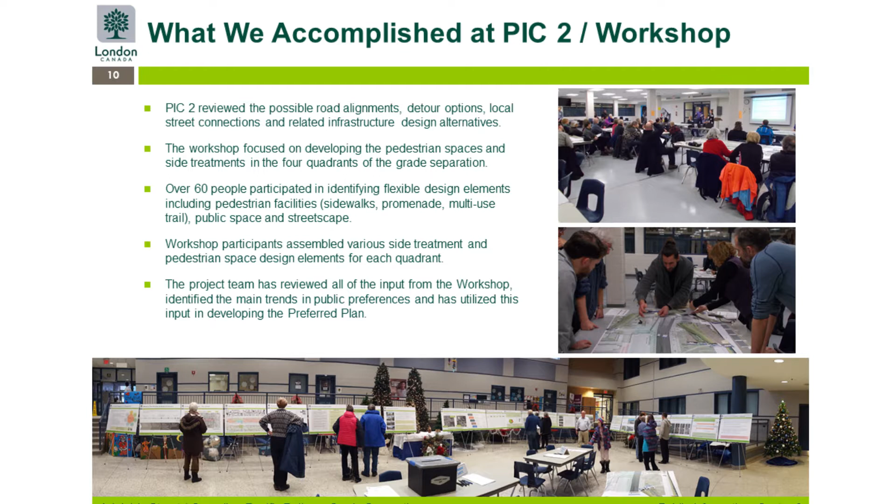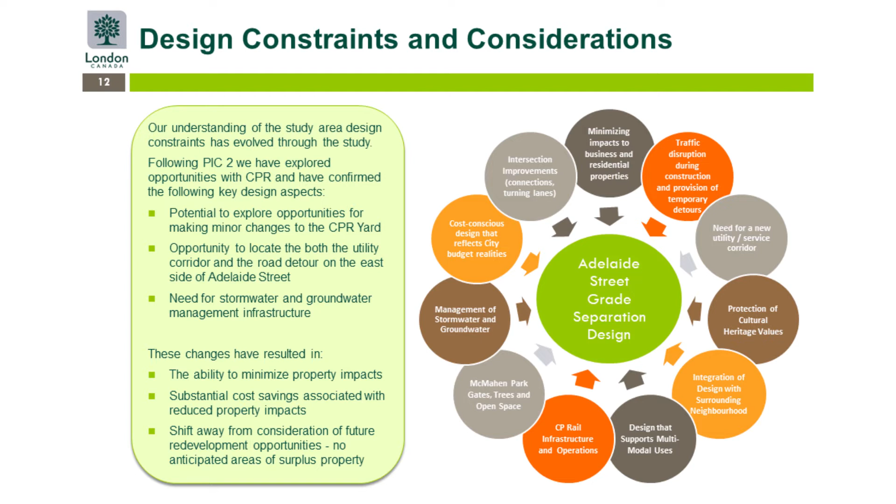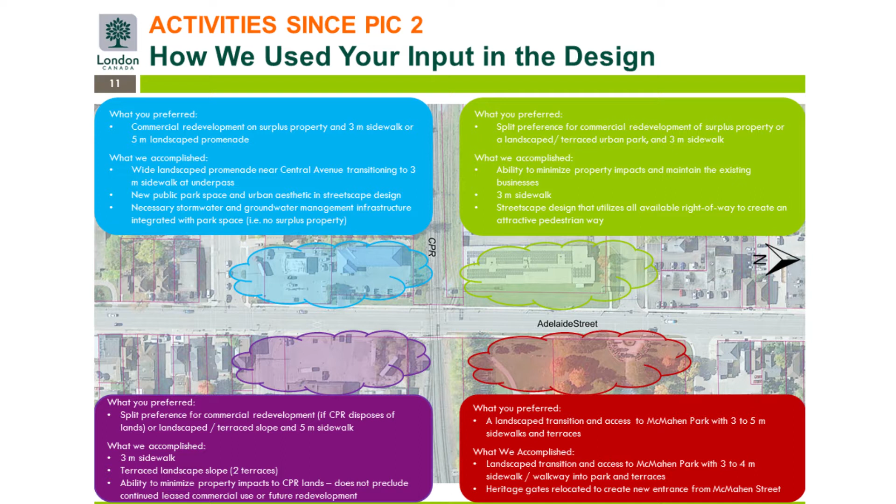The second public meeting was held in December 2016 and centered around a community workshop to obtain input on some of the streetscape design elements. The input we received enabled the project team to prioritize the streetscape design aspects that were important to the community. Since then, the project team has been completing technical investigations and has had an ongoing dialogue with CP Rail to develop a design that reflects transportation needs, property impacts, community interests, culture, and public input.

Adelaide Street is a key part of the Woodfield, Old East Village, and Piccadilly neighborhoods. It's also an important transportation corridor that accommodates over 25,000 vehicles every day. Unfortunately, the road is blocked numerous times throughout the day by rail traffic, which leads to cut-through traffic through adjacent neighborhoods. As a result, this project is the city's top priority for new grade separations in London.

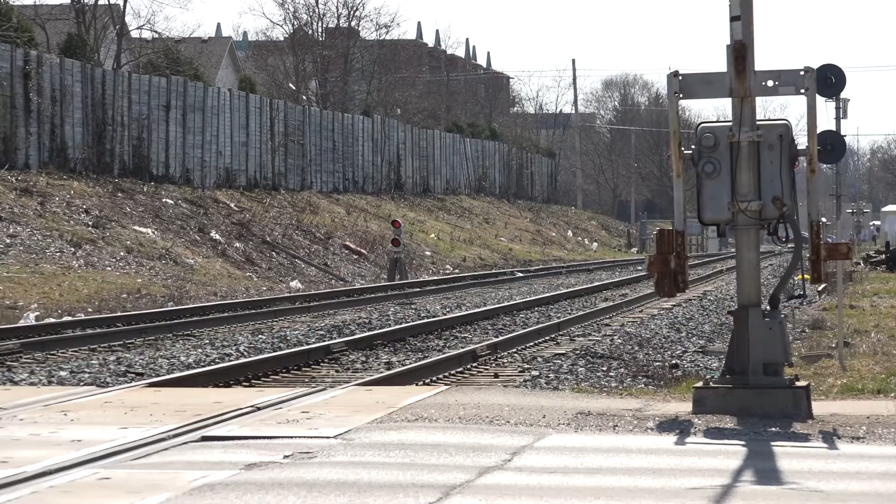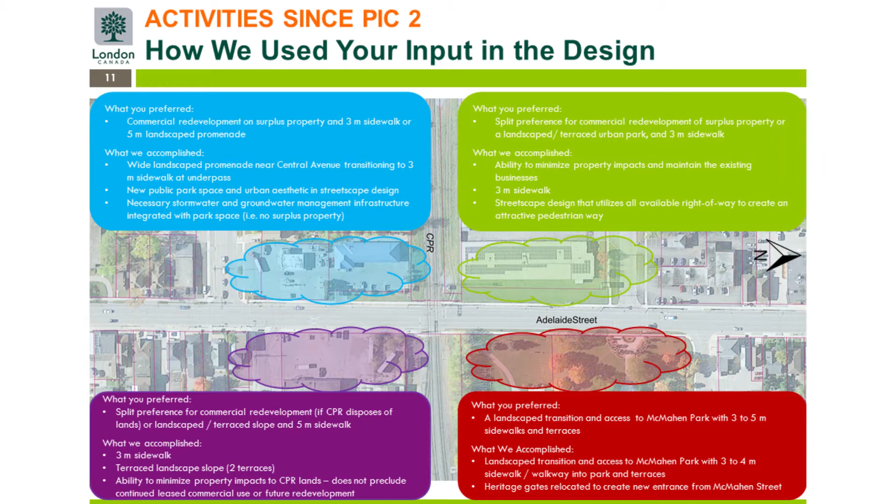One of the most exciting aspects of the project is the opportunity to incorporate streetscape design elements. The community input received at the previous workshop has guided the development of these aspects of the project. Cindy Rowan is part of the project consulting team that is working on creating an exciting streetscape for the project. Hi, I'm Cindy Rowan. I'm a landscape architect and urban designer with WSP, and we've had some very informative and close consultation with the community and with stakeholders and with city staff, and the new design really reflects this process.

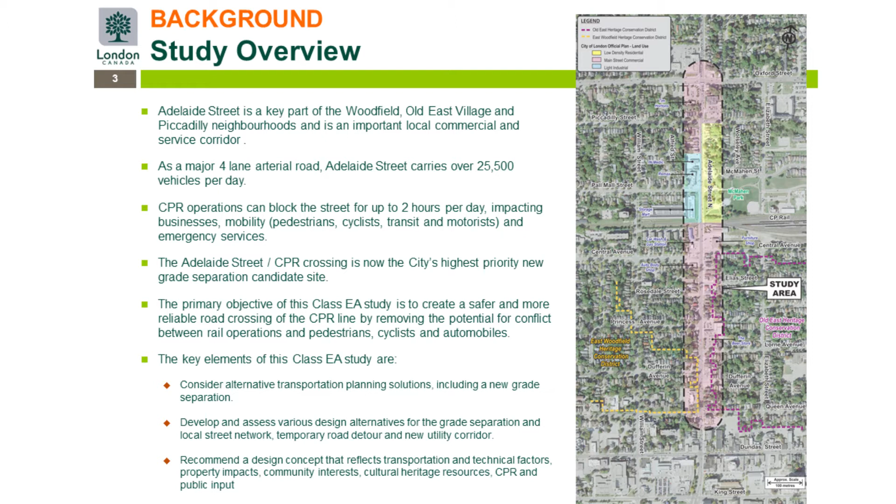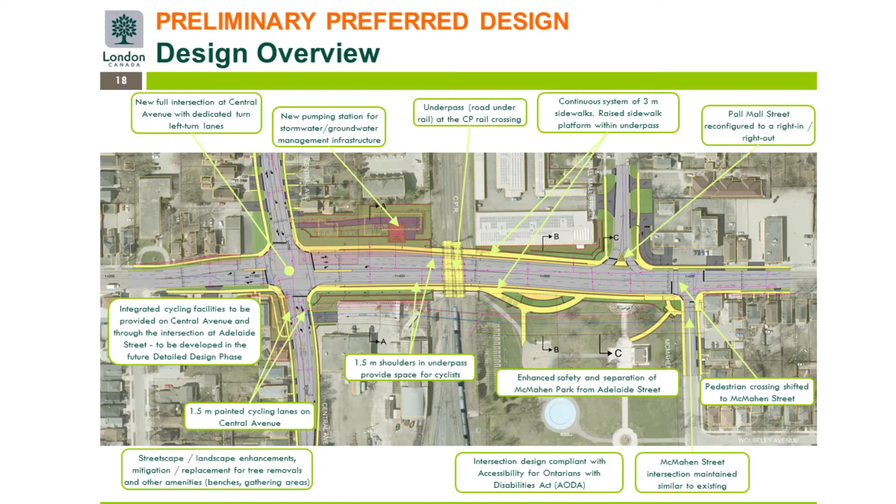So starting near Central Avenue, this is where the road starts to drop down towards the new bridge. The grade separation is slight at this point, but we will have some small retaining walls that really frame that intersection at Central Avenue and create a bit of a gateway as you proceed down towards the new bridge. Most importantly, the project team is recommending an underpass, meaning the road will go underneath the rail line.

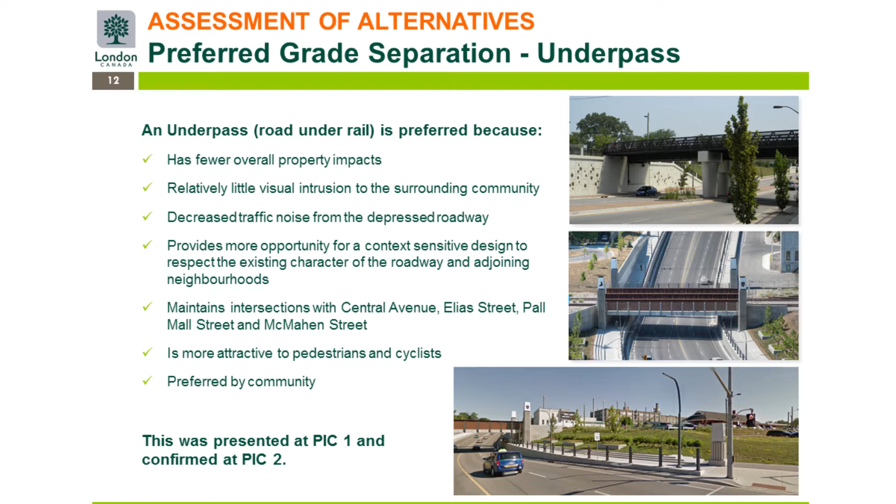So the primary goals of the streetscape design for Adelaide are really to integrate the new bridge and the grade separation into the community in a way that minimizes impacts to buildings, property, and businesses, and really knits itself seamlessly into the heritage character of the communities that surround it. We really want to look at creating very pedestrian-friendly streetscapes and create that connection between the various communities that exist today, but through the new grade separation, so that it doesn't feel like a barrier, but it feels like a part of the connectivity of the neighborhoods that's there now.

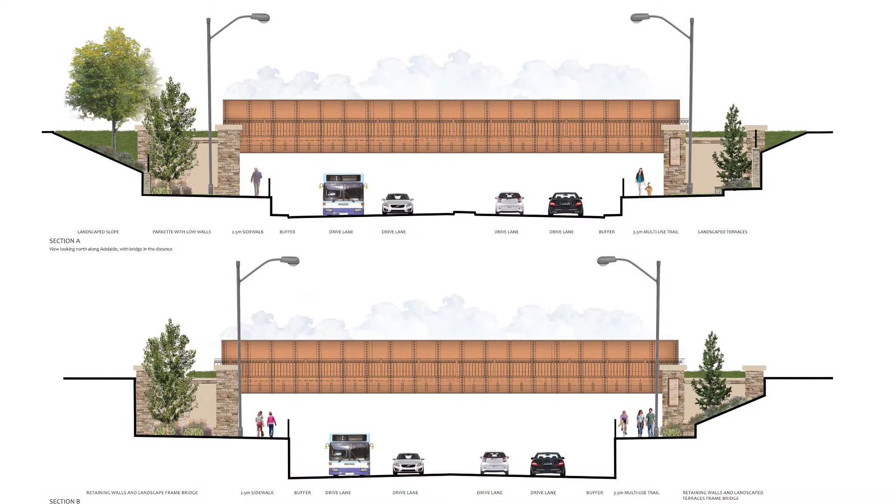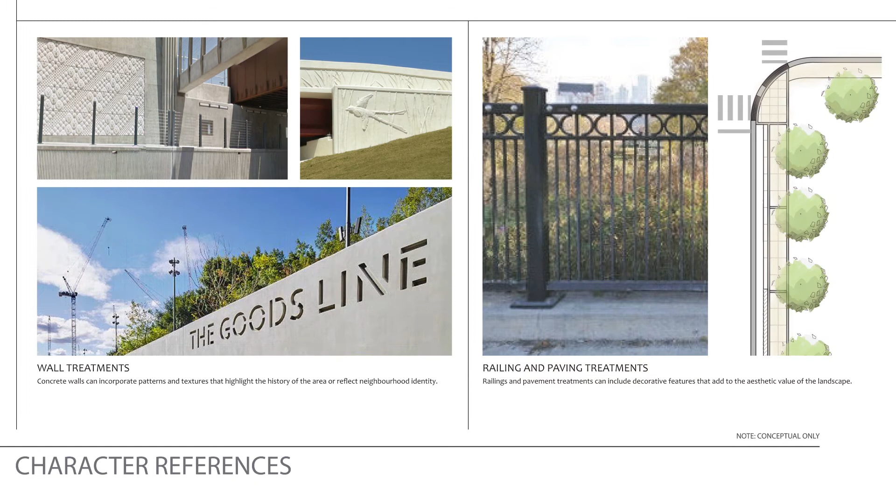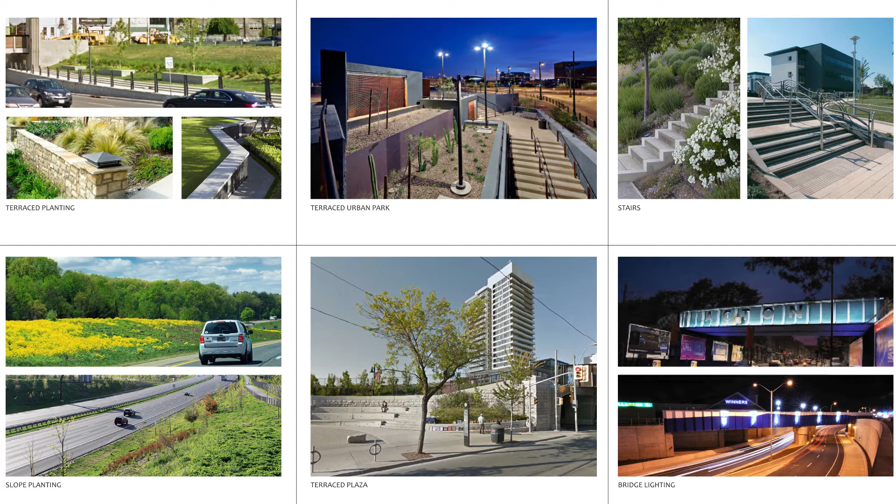Raised sidewalks up to 3 meters wide will be provided within the underpass. So it's really going to feel as though you're just walking straight along the way you are now, below the bridge. And the new sidewalks will have a variety of paving treatments and railings and lighting and architectural detailing that's really going to make this area feel like a distinct place with important character. And 1.5 meter wide shoulders on either side of Adelaide Street will provide space for cyclists.

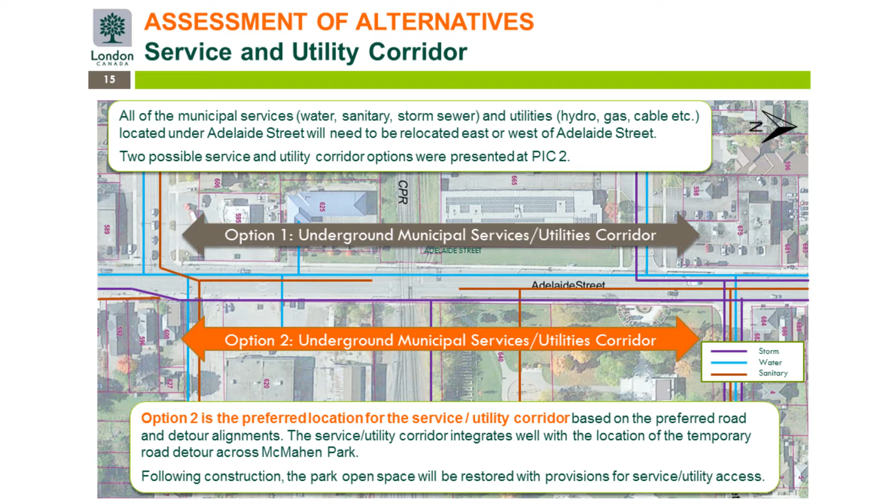The existing utilities, such as hydro and the municipal services, water mains, sewers, will be relocated outside of the underpass to an underground utility corridor along the front of McMahen Park. This area will also be used for traffic management purposes during the construction. A temporary detour will follow the same path along the east side of the site.

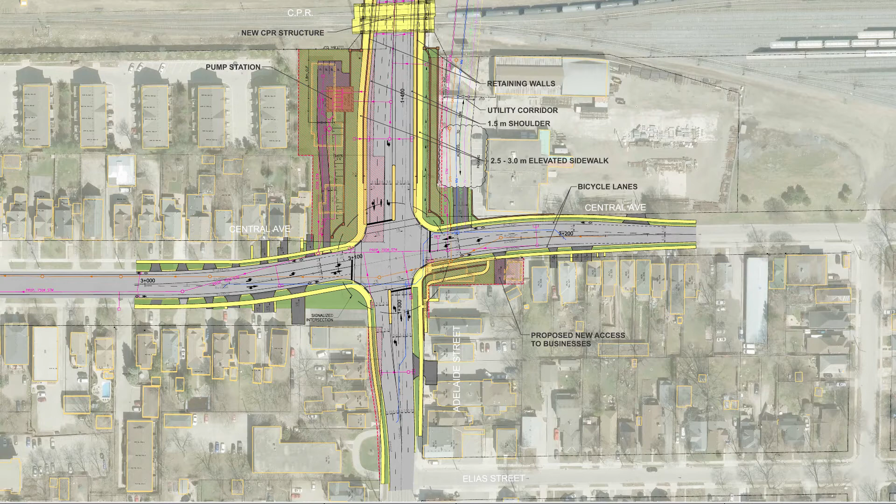The project provides an opportunity to improve the existing intersections along Adelaide Street. The jog in the Central Avenue alignment will be connected, and it will become a fully functional intersection with left turn lanes. Bicycle lanes will also be provided along Central Avenue. The alignment of Pall Mall and McMahen Streets will remain the same. The pedestrian signalized crossing will be shifted slightly north to McMahen Street, where it'll fit better with the new entrance into the park. The Pall Mall intersection will need to become a right-in, right-out intersection, meaning no left turns are permitted due to sightline constraints in the area of the underpass.

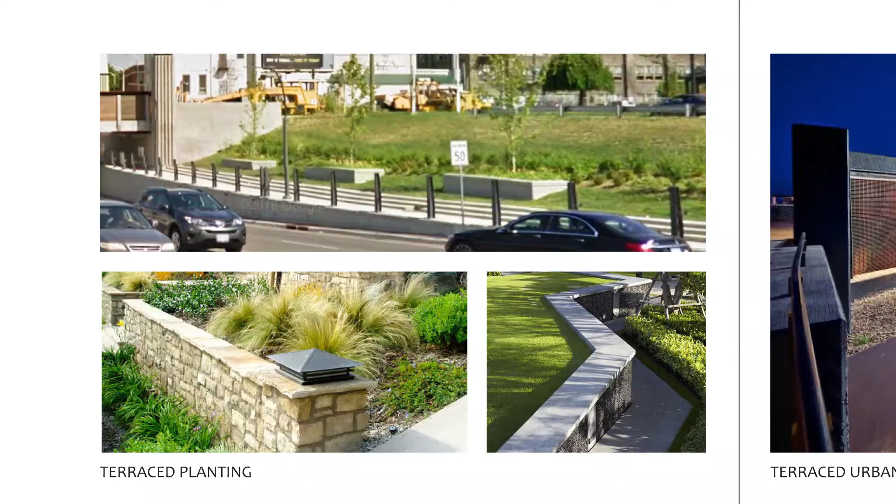The proposed design offers benefits to McMahen Park users. Adelaide Street will be lowered and will become less visible from the park. It creates a bit of extra separation between the park and the road and the traffic. So the park might become a little bit quieter, a bit nicer views because you'll be able to see directly into the neighborhoods without having traffic in the foreground. Additional landscape design elements proposed in this area will add to the visual buffer. The bridge is actually quite narrow, so passing under the bridge is not going to be like a dark area. It's going to be bright, it will be illuminated at night, and really a nice place to walk.

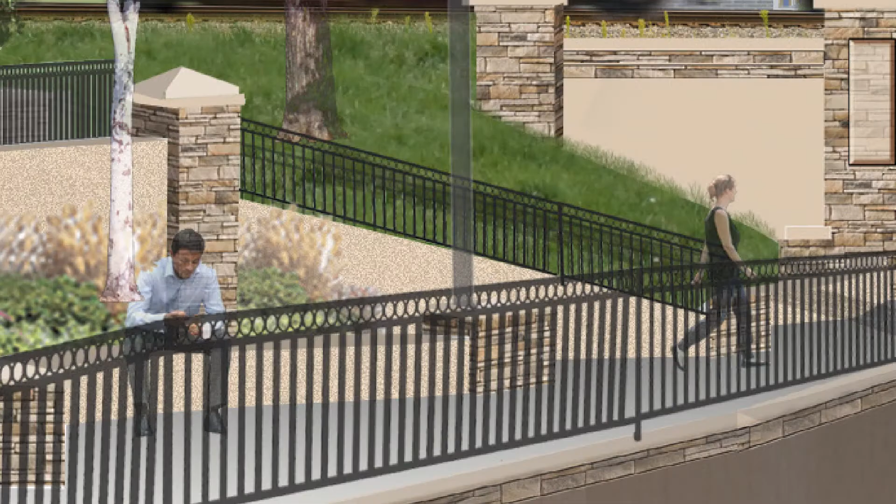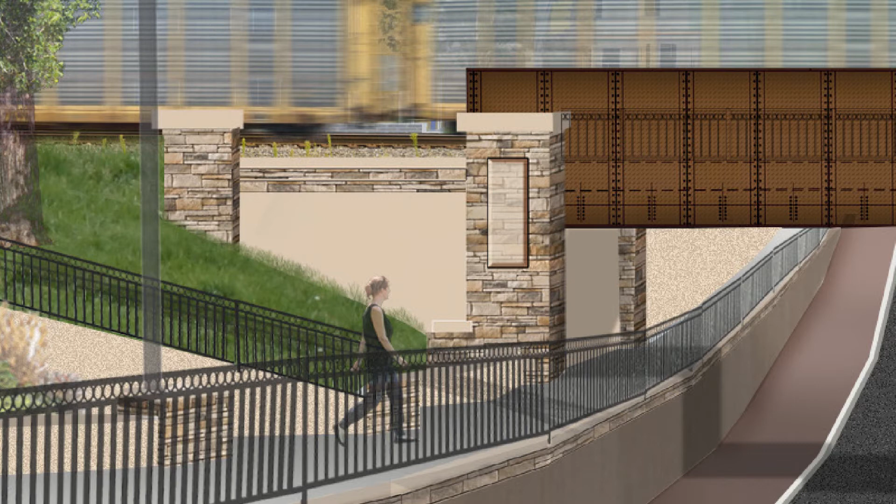So we want to look at the local architectural character. One of the things that's really been inspiring to us is McMahon Gate, which is currently the entrance to McMahon Park, and has beautiful architectural detailing and stonework and materials, and is surrounded by heritage buildings and things that really create the identity of the neighborhood. One of the things that's been important to us is to integrate those features into the architecture of the bridge, of the walls, of the abutments, and of all the various architectural features. Because you're entering the park at the corner, we're proposing to reconstruct that gateway basically at the corner so that it frames the new entrance of the park in the same way that it framed the old entrance of the park. So really retaining and continuing to celebrate that heritage feature.

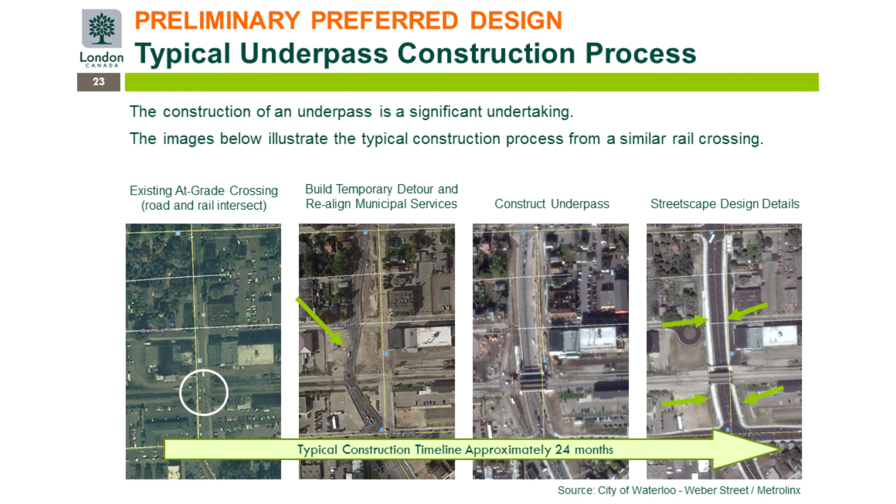Following this public meeting, the project team will take the feedback received back and refine the preliminary design concept. All of this will be wrapped up into a final report, which will be presented to Civic Works Committee and City Council. The design and property acquisition will start, followed by construction of the project in the 3 to 5 year time frame. We've worked very closely with community members, with stakeholders, with city staff, and various other interested parties. Everything that we've talked to you about today is really a product of all of that effort and all of those great ideas. Thank you very much for your interest in this project.